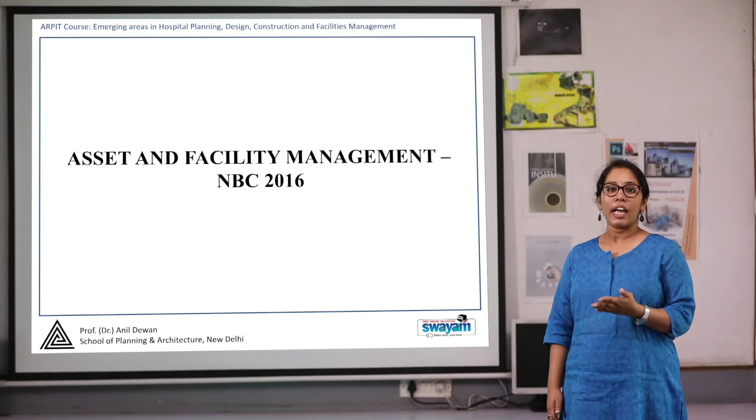As we have seen over the past decade, a lot of construction has already happened in India and it's booming further. We'll see that the growth of construction is going on. Since there is a lot of growth in construction, as a nation we need to have a building stock moving more efficiently. So the asset and facility management will ensure it. To realize full potential of asset and facilities, a well-planned maintenance strategy can make a positive impact on safety and business development. So what is the scope of this part?

It is relating to management of building assets and the associate facilities. It will include maintenance of types of facilities, fixed assets such as building and the services along it.

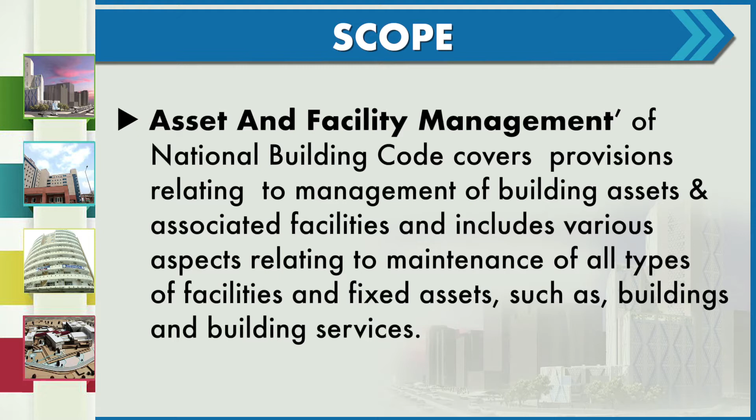So asset, let's define what is asset. For an individual, it is something that has a value, a life, and which is available to meet debts, commitments or legacies and performing functions to facilitate the user. So there are various types of assets we can have: physical asset, human asset, information asset, financial asset and intangible assets. But here for this course we are only focusing on physical assets.

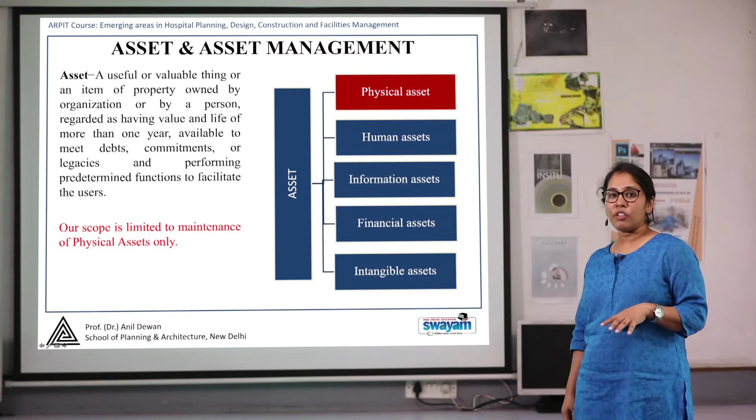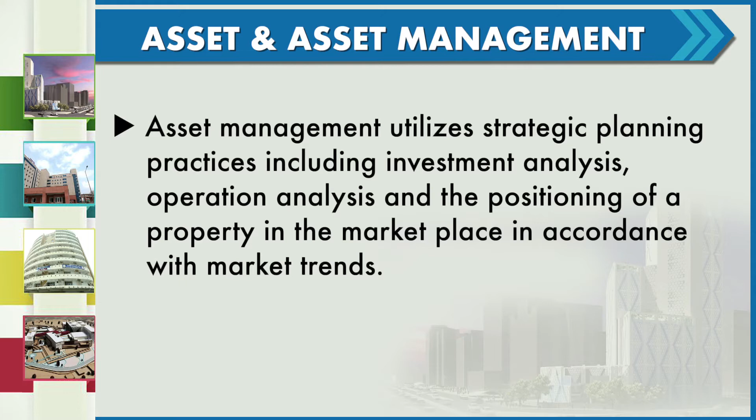So we discussed what is an asset. Asset management is a different entity in itself. It's a process for enabling the owner to maximize the value of any property or portfolio of properties by means of acquisition to disposition within the objectives that an owner defines for his property. Tools such as strategic planning, investment analysis, operation analysis, and how the positioning of the property in marketplace is according to the market. It is a simple real estate analysis.

If your property is within a commercial area, definitely its rates will be higher, and as you plan the asset, it will be beneficial to your own property.

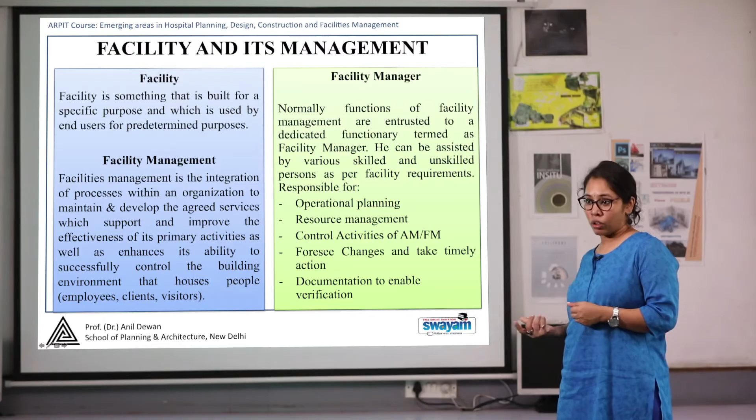Now, a facility cannot be run, for an instance of hospital. A doctor or a nurse cannot run facility. You need a specialist person who will take care of this. So a facility manager is a person who is assigned and who is skillful enough to take the responsibilities for operational planning, resource management, control activities of asset management as well as facility management. He foresees changes and takes timely action, and his task is also to document and verify what has been happening in the facility process.

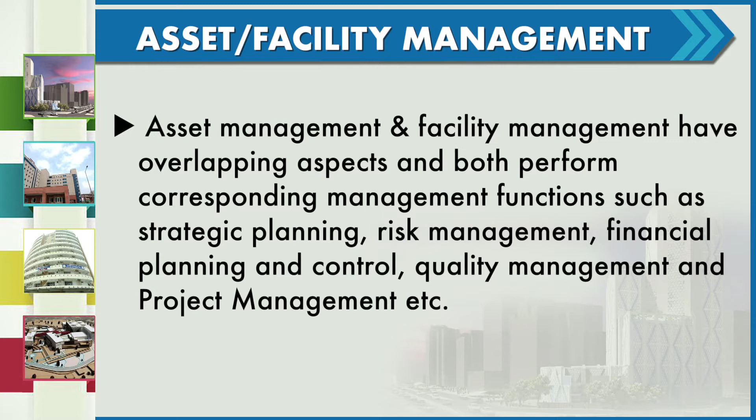So far we discussed what is asset management, what is facility management. These are actually an overlapping aspect. They both perform corresponding management functions such as strategic planning, risk management, financial planning and control, quality management and project management. So there are certain identified core competencies within the area of asset and facility management, which is communication, emergency preparedness and business continuity, environmental stewardship and sustainability, finances and business, health and safety environment, leadership and strategy, operations and maintenance, project management and quality.

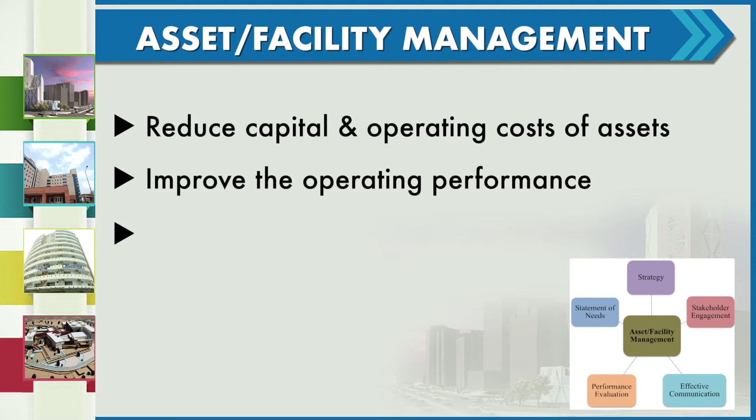So why do we require facility management in an organization? It has various importance such as reduction of capital and operating costs, improvement of operation, reduction in health impacts and safety risks of operating assets, minimize adverse environmental impact, maintain and improve the reputation, regulatory performance of any organization, reduce legal risks, enhance life of any asset, and it also ensures that the asset continues to meet a standard.

So here we see asset facility management has stakeholders engagement, effective communication, performance evaluation, statement of needs, and a strategy that is helpful for facilities.

We come to the organizational structure of any asset and facility management. Who are the people who guide any organizational structure of a facility management? It is the competence of any staff, organizational roles at various levels, facility manager, outsourcing of certain items that will help facilities, and what is the scope of work.

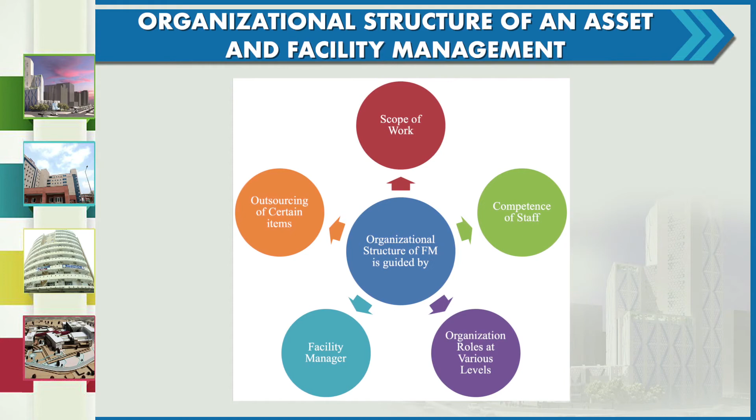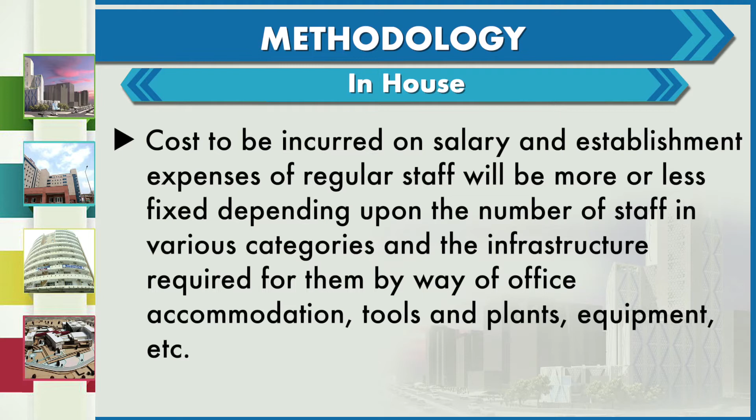Now, the methodology, it is divided into 3 parts, that is in-house, outsourced, and what process has to be adopted. So for in-house facility management, it will depend on what cost will be incurred for salary, establishment, and expenses for the staff, and it will also depend on the requirement, the availability of funds.

Cost incurred on work will depend on the actual quantum of work that has happened. According to that, the in-house facility will be categorized.

There are certain things, such as an internet facility, for instance, which can be outsourced. That is a facility that is outsourced, not in-house. So the organization will take into account what facility needs to be outsourced, what the risk behind it will be, and what activities can be controlled.

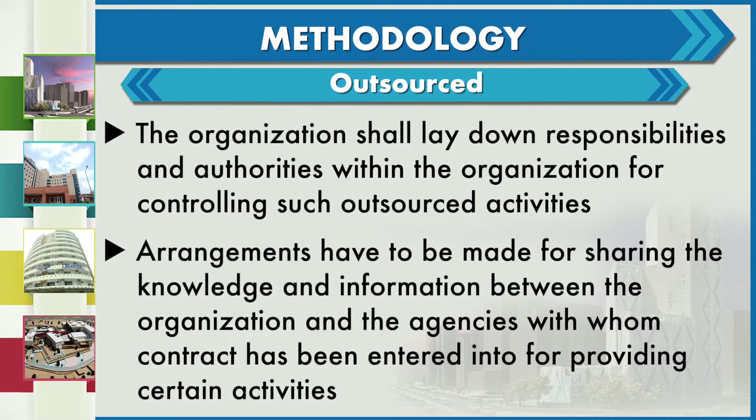There has to be a clear demarcation that this facility needs outsourcing, and the organization will lay down responsibilities and authorities within this. There will be an assigned person to take care of the outsourcing, and arrangements have to be made for sharing knowledge within your organization, so that support can be facilitated for this facility.

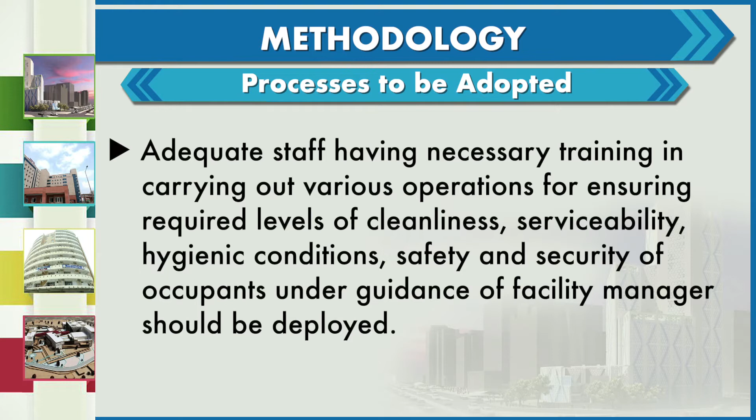The third thing is what processes have to be adopted within your organization, and necessary training that is required. When we go to malls, in the toilets we see a chart with tick marks and signatures. That is the facility management team's method of checking whether the facility in that area is functioning properly, so the person responsible has to be trained for that.

The facility management team will draw plans and tables to check that. Now coming to resource requirements for asset or facility management: the first things are resource assessment, resource plan, adequacy of resources, and need assessment.

Resource assessment comprises maintaining an individual asset to deliver the most effective outcomes in terms of minimal cost and risk. The resource plan is prepared for assets operating under normal conditions.

Need assessment should align its services needs, including dependency, utilization, location, capacity, and functionality. For adequacy of resources, the resources available may be compared with the resources required.

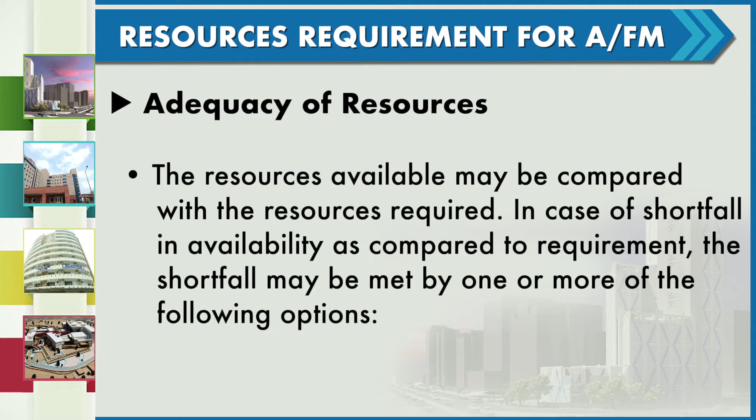The shortfall may be met by one or more options: augmenting in-house resources, augmenting outsourced resources, or when resources cannot be augmented, postponing the requirements which are not so urgent.

Procurement of services is one option in which you assess what procurement method is required for delivery of maintenance related services that best fits the business.

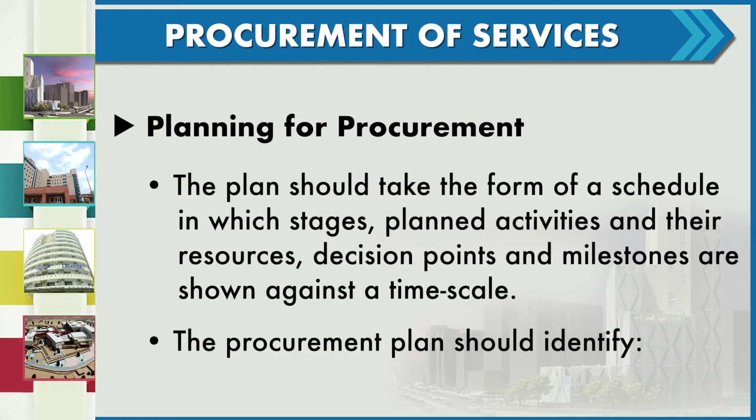Planning for procurement takes the form of deciding what activities need to be performed and the resources required accordingly. It will have decision points and milestones, shown against a time scale.

So what does the procurement plan do? It identifies stages and decision points in the procurement process, criteria for decision making, activities within stages and their sequences, sources of information and data to be used, individuals and external organizations to be involved and their roles, other stakeholders who may be involved, and resources needed to support the activities and deliverables at each stage and the form they should take.

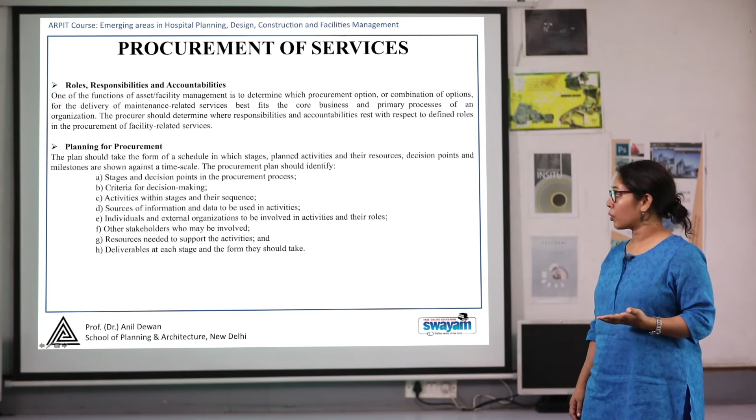It has two kinds of processes: pre-qualification, where you give a request for proposal and various procurement companies bid for it. This involves the legal form and ownership of the service provider, their area of specialization, proposed approach to service delivery, extent of subcontracting, relevant track record, and financial capacities.

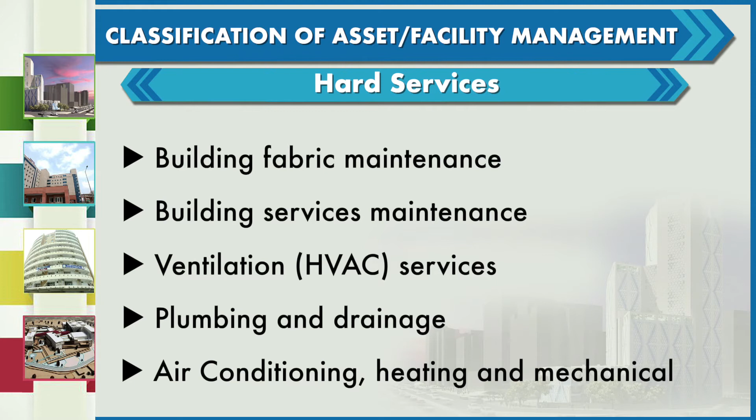As already said, there are two types of asset facility management: hard services and soft services. Hard services take care of your building fabric like the building envelope and roof, and building services maintenance such as HVAC systems, plumbing and drainage, air conditioning, heating and mechanical and electrical systems, lifts and escalators, firefighting detection and suppression, and roads and pathways. We will discuss this in detail in further slides.

Soft services include environment health and safety, landscaping and horticulture, waste management, housekeeping, pest control, security management, solid waste management—which is an important issue in hospital management—and common areas in the building and built environment.

It is natural that if we are constructing a building, it also requires maintenance. So the prime objectives of maintenance are to preserve building services and machinery in good operating condition, to restore them back to their original standards, and to improve facilities depending on the development of the building.

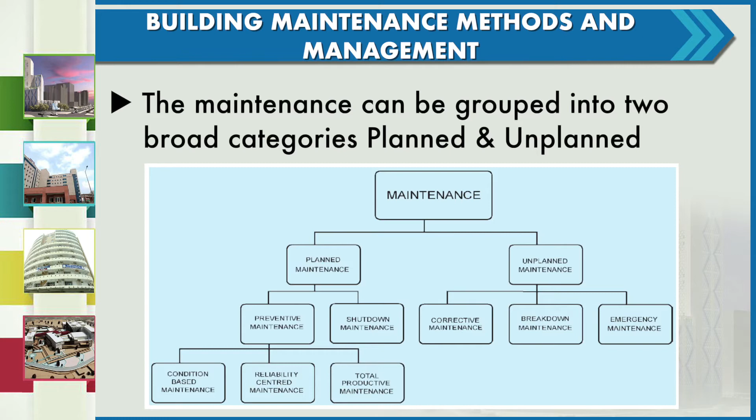Building maintenance can be categorized into two types: planned maintenance and unplanned maintenance. Planned maintenance, as the word describes, is when you already know that this kind of maintenance is required in the course of action. Unplanned maintenance can happen, suppose a duct is not working - that is an emergency case scenario, so you go and maintain that. This comes under emergency maintenance.

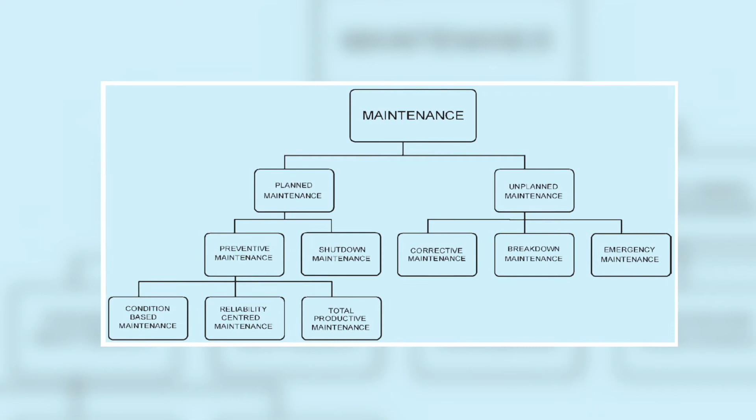Planned maintenance includes preventive maintenance and shutdown maintenance. Shutdown maintenance means you inform the occupants of the building beforehand that we are going to plan a shutdown for the building's maintenance, so they can plan their activities accordingly. Preventive maintenance has three types: condition based maintenance, reliability centered maintenance, and total productive maintenance. Unplanned maintenance can be corrective maintenance or breakdown maintenance - suppose there is a breakdown of your electric transformer or something, that is an example - and then emergency maintenance.

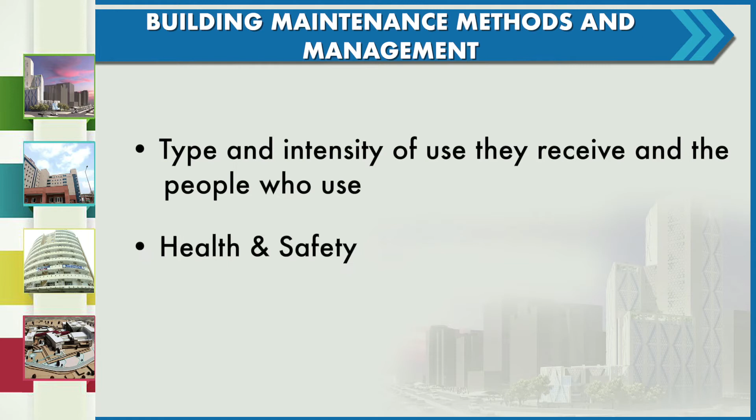Aspects influencing building maintenance can be technical factors like age of building, how it was designed, and what materials have been specified for its construction. Then there are certain maintenance policies that a building goes through, financial and economic factors, type and intensity of use - whether they have been used regularly or there has been less use - health and safety, and environmental factors. It also depends on how the design is influencing your building.

It may be due to attention of maintenance requirement from the planning stage, attention to services and testing of lines, life cycle cost, types of finishes, fire and life safety requirements, detailing of each and every component, accessibility for maintenance purpose, environmental factors such as external and internal, and any future requirements by the owner.

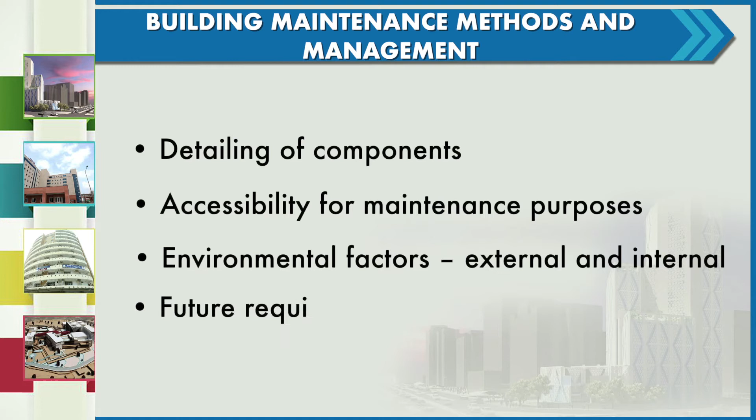Maintenance planning can be divided into four: assessment, financial management, planning process, and general planning. In assessment, an organization will assess the benefits of maintenance planning based on the assessment it has done. Financial management happens according to the budget that an organization has decided for the building's maintenance.

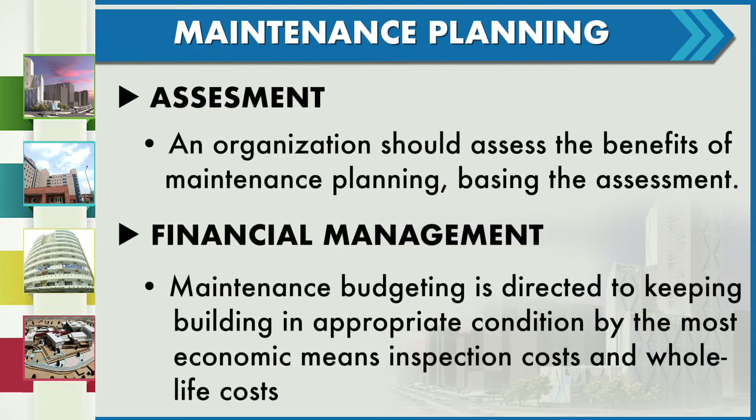Planning process involves information and data gathered from the process that will be used to reinform the organization's needs for and use of facility assets during this and future iterations of this process. In general planning, the maintenance plan should be prepared in consultation with stakeholders.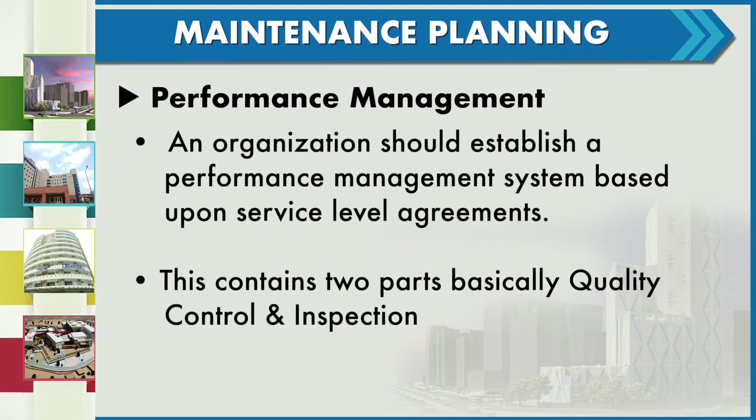Maintenance planning also involves performance management, which can be divided into quality control and inspections. Performance management is basically for improving the efficiency and effectiveness of maintenance management. It involves monitoring and controlling, and it can happen for both internal arrangements or outsourced arrangements, in two ways: quality control and inspection.

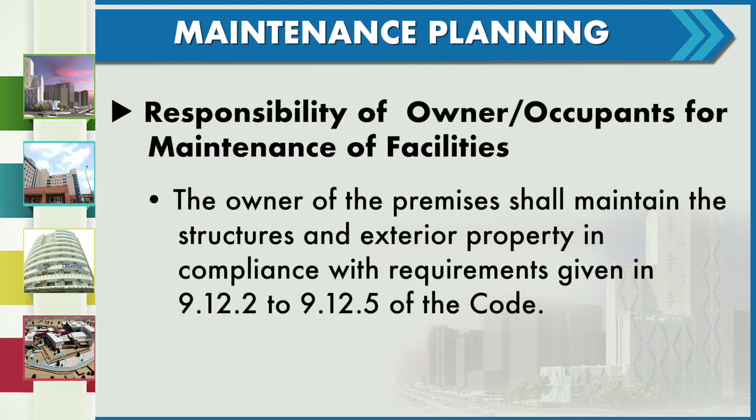Inspections mean that at every point of time you go and check if that facility is working properly or not. There are standard norms for maintenance management, discussed in Annex C of the code. Then responsibility of owner occupants for maintenance of facility is given in 9.12.2 of the code. Common area maintenance - maintenance of common areas in a building group - should be the responsibility of all those who share the common areas.

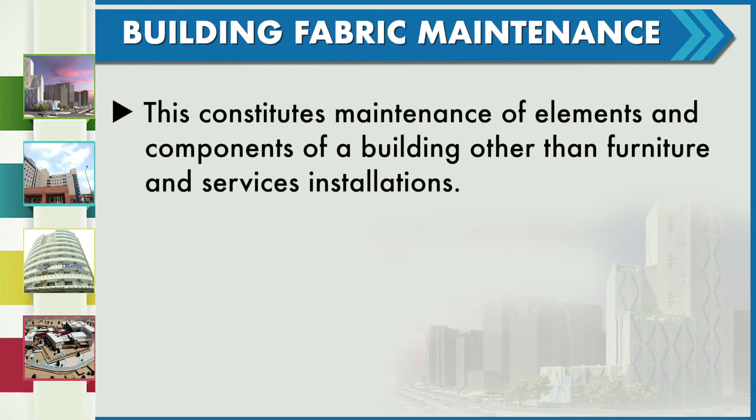Now we come to the details of hardcore services that I told you earlier. The first one is building fabric, which is your building envelope and other components other than furniture and services installations. It covers prevention of cracks, repair works, seismic strengthening, retrofitting of any existing building, and that will be done according to the construction management practice and safety given within the National Building Code.

While demolishing a damaged building or existing unsafe building, safety precautions will be given as per Part 7 of construction management in the code.

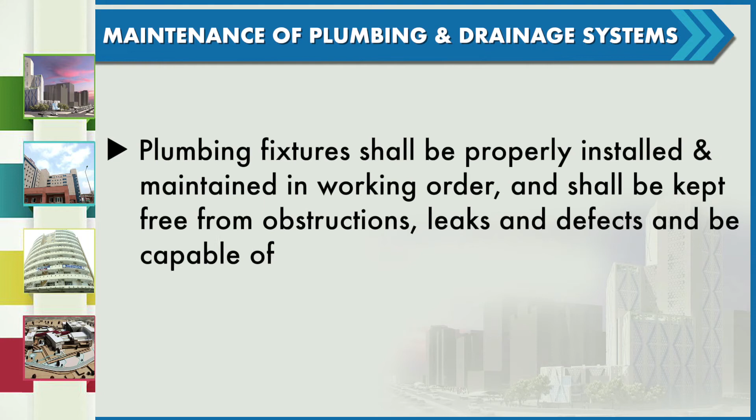Maintenance of plumbing and drainage system: the fixtures that are installed in plumbing shall be installed and maintained in working order. If there is a place where there is an immediate need attended, such as inadequate venting, cross connection, or back siphonage action, that will also come under maintenance of plumbing.

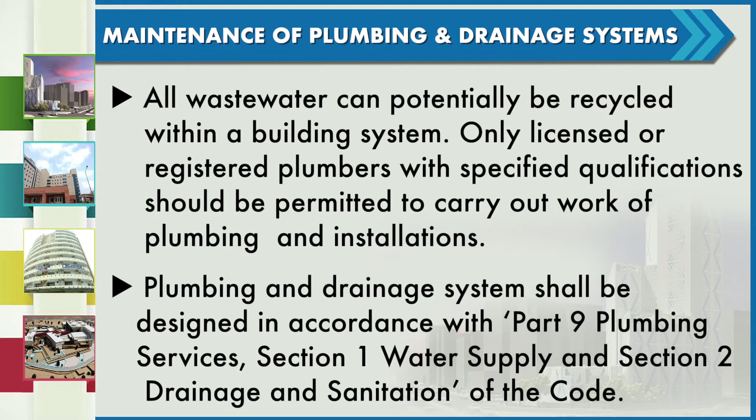All wastewater can or should be recycled within a building system, and it will be done only by licensed registered plumbers with specified qualifications. It is also important to provide rainwater harvesting and storage system to capture the runoff from the surfaces. So what are the precautionary measures that are needed to provide it?

It will avoid chemical drain cleaning products, prevent future clogging, install screens over the drains in showers and tubs, reduce the pressure, soften the water, and keep sewer lines or septic tanks clear. The details are given in section 11.10 part 12 of NBC 2016.

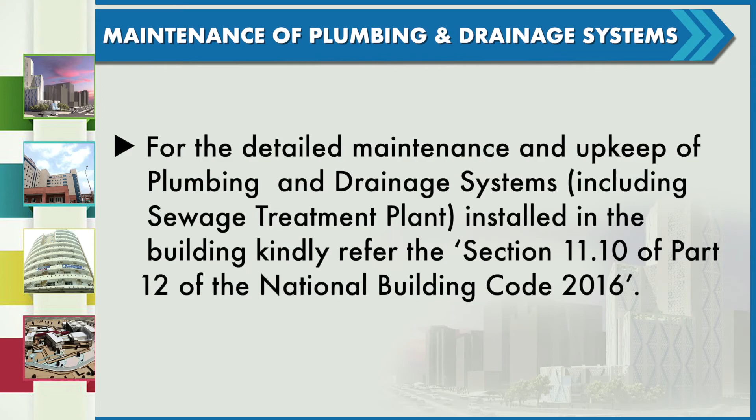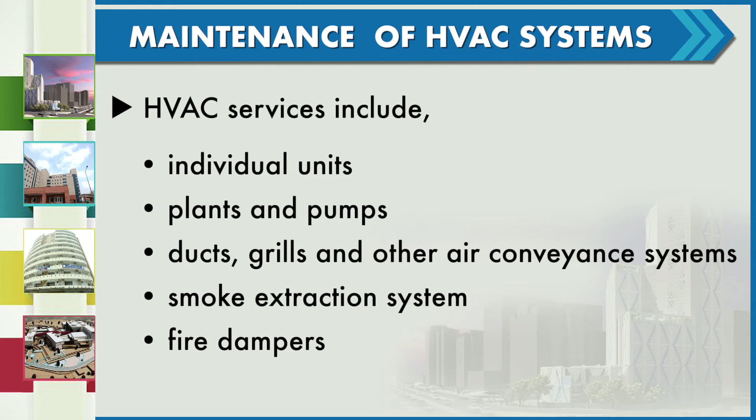Now coming to HVAC system. The aspects of operation and maintenance of HVAC services, so that it improves the performance of equipment, reduces the risk of failures, and increases the life and effective use of equipment, is covered under HVAC services. It includes individual units, plants and pumps, ducts, grills and other air conveyance systems, smoke extraction systems, and fire dampers.

For any effective management of this asset, a component-wise operation and maintenance protocol has to be observed. To perform this, you need to understand the basic operation system. A facility manager will also go through the operation manual of any system. The selection of system has to be taken accordingly, keeping in mind the specific requirement of the facility, duly computing the heat loads and other relevant factors within an HVAC system.

The most important maintenance within an HVAC system is regular cleaning of filters. Operation of a central AC plant will be in a sequential manner and beneficial to be done with a building management system. Depending upon the type of facility, type and specification of equipment installed, usage and other operational and financial constraints, the optimum frequency of carrying out the services should be determined.

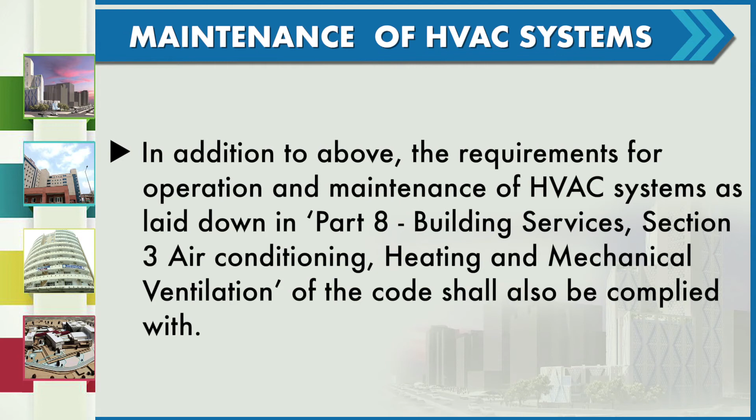In addition, the requirement of operation and maintenance is given in building services part 8, section 3, air conditioning, heating and mechanical ventilation. We come to the next section, that is maintenance of electrical installations.

Electrical installations in a building have to be installed and constantly maintained for uninterrupted use, and it has to be efficient use of electricity including safety from fire and shock.

The coverage is limited to maintenance of internal electrical installations, which will cover HV panels, HV switches, transformers, LV panels, floor panels, earthing, internal electrical distribution systems, light fixtures, switches, lightning arresters, street lighting systems, facade lighting and transformers.

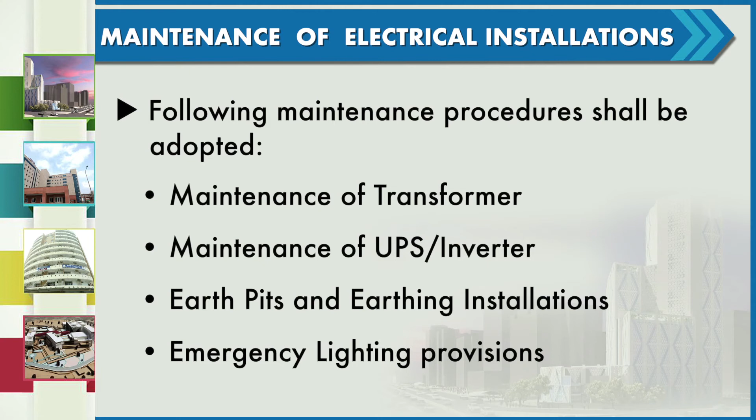The manufacturers will be requested to at least minimum specify the routine maintenance and post-fault maintenance. The following maintenance procedure shall be adopted: maintenance of transformers, maintenance of UPS, earth pits, earthing installations, emergency lighting provisions, maintenance of circuit breakers, maintenance of battery, DG set and its auxiliary operation, lockout and tag out process. Proper signages shall be displayed to discourage any unauthorized personnel in this area.

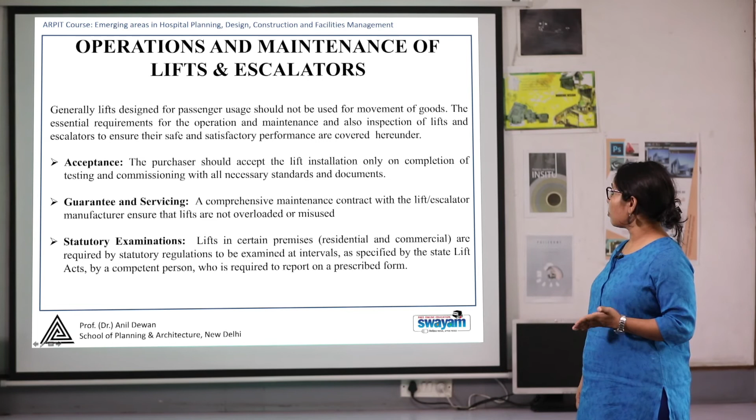Operations and maintenance of lifts and escalators. Usually the lifts are designed for passengers, but in a hospital scenario they will again be differentiated for passengers, for visitors, and for carrying patients, beds and trolleys.

It will be according to that, and the maintenance and operations will follow differently for each and every lift system. The purchaser will accept lift installation only after the testing and commissioning, once it has followed all the standards required for the installation.

It will give guarantee and servicing, a comprehensive maintenance contract will be maintained, and the statutory examinations will be done. Lifts in certain premises will be required by statutory regulations to be examined at intervals specified by the state lift acts, by a competent person who will make a report in a prescribed form.

Operations and maintenance of lifts and escalators will again have an annual maintenance contract. A document is made in the interest of the lift purchaser and manufacturer within agreed terms by both parties. There are two types of service contracts, comprehensive contracts and non-comprehensive contracts. Usually a service contract is made for 12 months at a time.

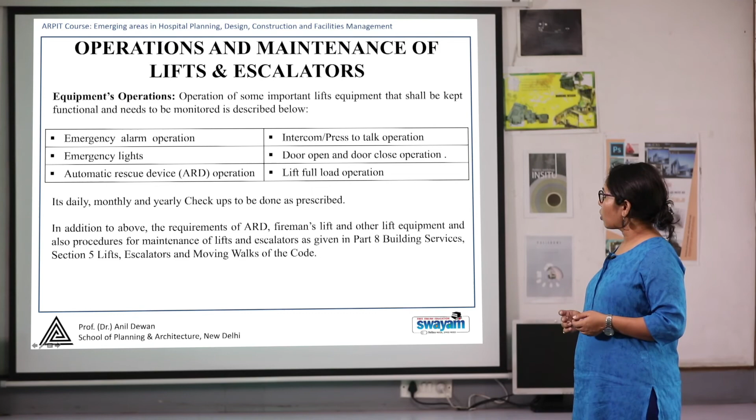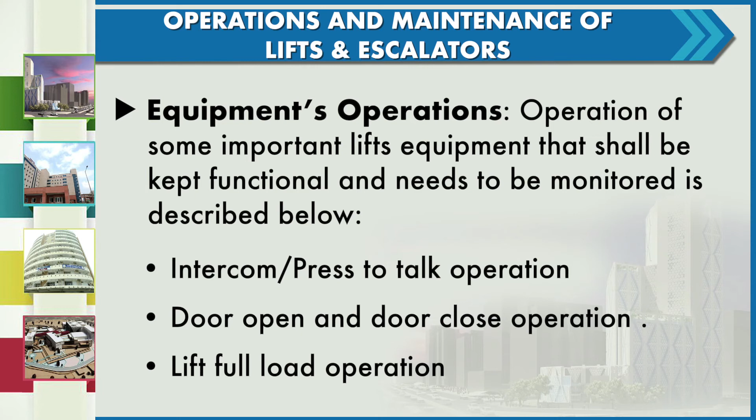The equipment's operations shall be kept functional and monitored in the following manner: emergency alarm operation, emergency lights, automatic rescue device operation, intercom press-to-talk operation, door open and door close operation, lift full load operation, and it will be checked on a daily, monthly or yearly basis as prescribed.

In addition, there will be a fireman's lift, other lift equipment, and procedures for maintenance of lifts, which will be given in the further part of the National Building Code.

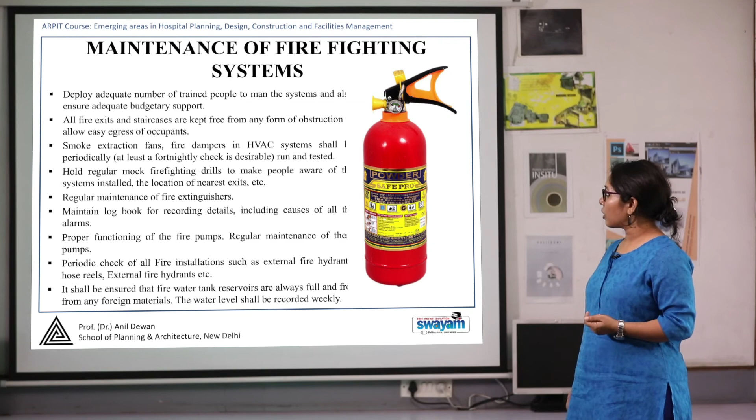Firefighting system in a building is very important, and especially in a hospital building we have to take care that it is done in a proper manner. There shall be deployment of a trained number of people to man the system. All fire exits and staircases will be kept free from any obstruction.

Smoke extraction fans and fire dampers in the HVAC system will be checked periodically and then run and tested. Mock firefighting drills are conducted, where a fire alarm system is played within the building for occupants to ensure they respond to the alarm and evacuate as soon as possible. This has to take place periodically.

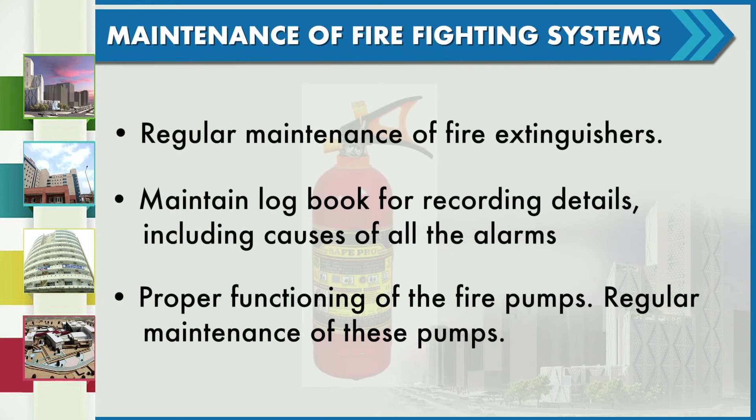Regular maintenance of fire extinguishers has to take place. A logbook has to be maintained including causes of all the alarms, proper function of fire pumps, and regular maintenance. There should be a periodic check of all fire installations such as external fire hydrants and hose reels. The most important thing is that all fire tank reservoirs should be full and free from any foreign materials. The water level will be recorded weekly.

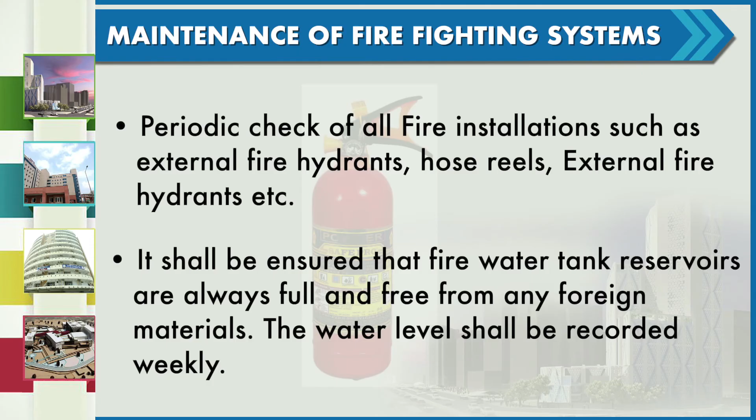Even the landscape hardscape needs maintenance on a time to time basis. It has to be ensured that roads are well planned and footpaths are provided at a standard height, usually 150 mm above the road surface, so they do not cause any obstructions to vehicles and are easily maneuverable.

All services required at construction should be taken care of in the planning stage itself, beforehand. Special attention should be paid to drainage areas, proper surveys and outlets of rainwater shall be ensured, ease of movement, road layouts indicating location of culverts, cross drainage and other underground services shall be prepared.

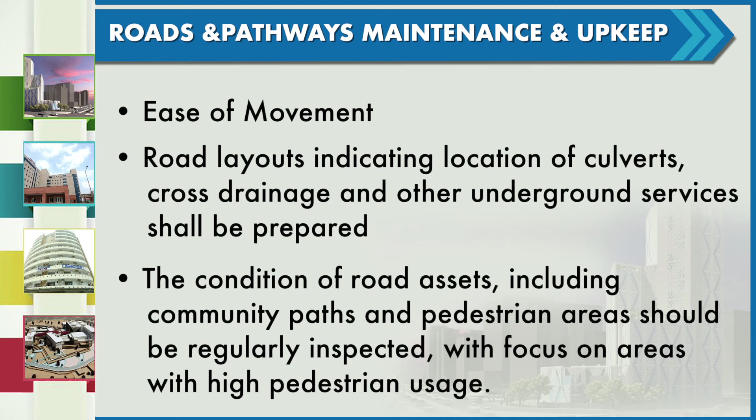The condition of road assets, including the paths within the community or pedestrian area, will be regularly inspected with focus on areas with high pedestrian usage. A pavement maintenance management system is used for managing or directing and controlling maintenance resources in a scientific manner for optimum benefits for the major road system.

Health and safety requirements: personal protective equipment, that is PPE, is a basic requirement that will be supplied to the employees at the time of construction. This is a stage which will be at the time of construction.

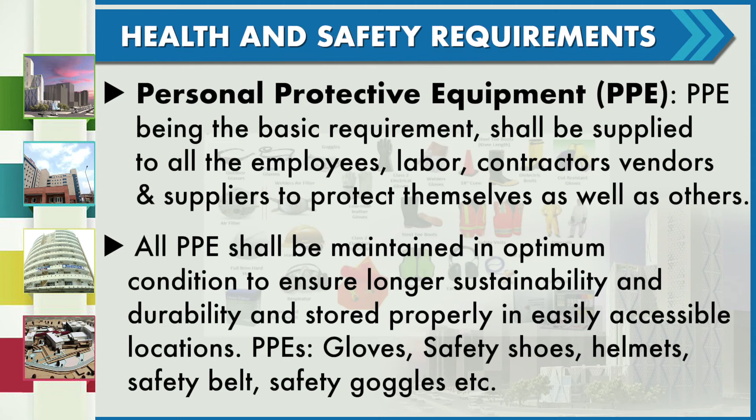There are certain maintenance tools which are recommended, such as class 2 electrical gloves, welding gloves, dielectric boots, safety vests and full brim hard hat. These are used during construction, and when you are going to maintain any facility you need to wear this for health and safety.

Next is maintenance of landscaping and horticulture works. The objective here is to provide defined services as per the landscape maintenance specifications laid down for a property. This will cover hardscape as well as softscape weekly maintenance services.

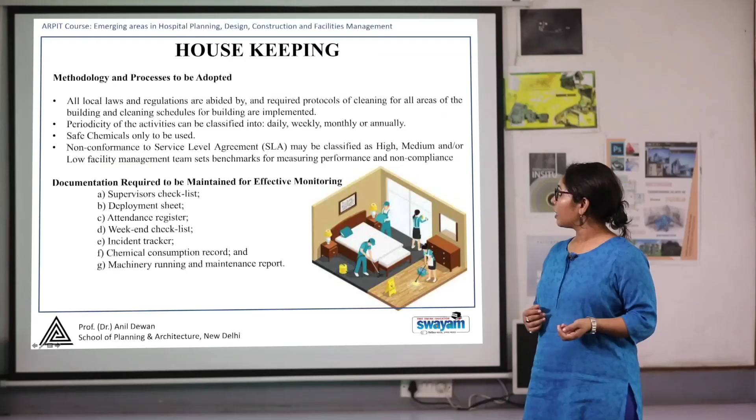Next is housekeeping, the methodology and processes that need to be adopted. All local laws and regulations are abided by, and required protocols for cleaning all areas of the building and a cleaning schedule are implemented. Periodicity of activities can be classified as daily, weekly, monthly or annually.

Safe chemicals are only to be used, specifically in hospitals where we need to ensure safe chemicals are used. Non-conformance to the service level agreement may be classified as high, medium and low facility management.

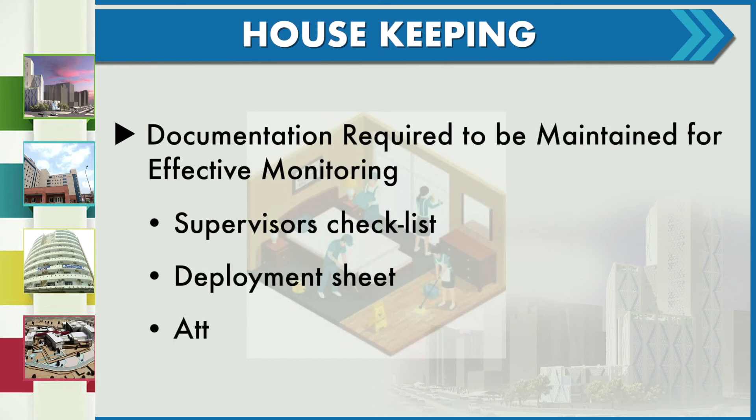There are certain documents required to be maintained for effective monitoring, such as supervisor checklist, deployment sheet, attendance register, weekend checklist, incident tracker, chemical consumption record, and machinery running and maintenance report.

Pest and rodent control: a clean environment and prevention is the starting point of pest control. It is a process which eliminates and minimizes a wide range of undesirable pests and insects.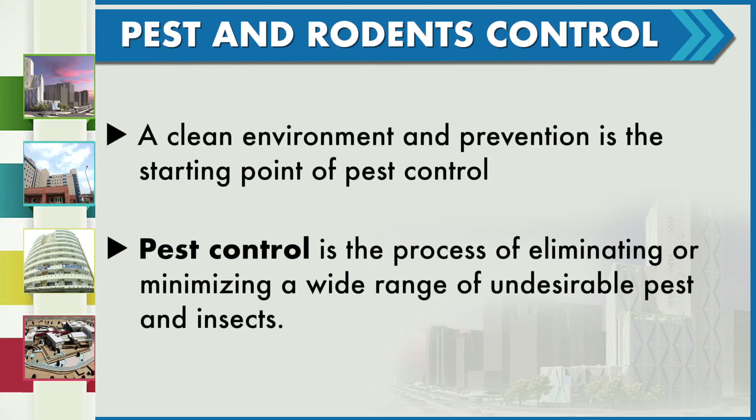Preparation of an integrated pest management plan can be useful, following guidelines such as: preventive measures should be explored, alternative methods of control to be evaluated, timely action for effectiveness and safety, adequate monitoring and documentation, and the most effective method to be adopted that has cost benefit and least environmental effect.

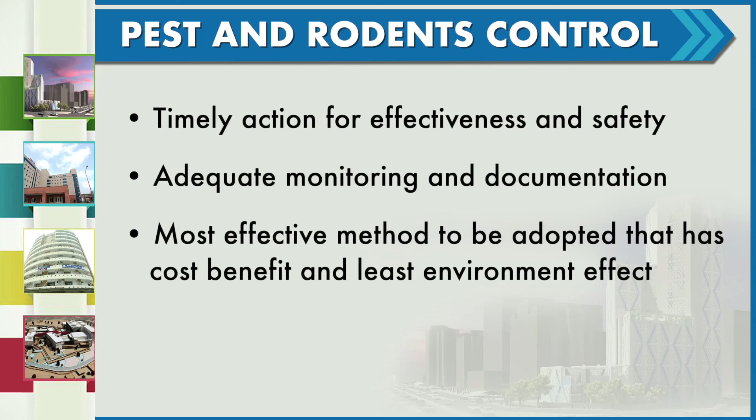The security services: the aim of any security services within a building is to take adequate measures and deny any opportunity of theft, of acquiring information, or committing sabotage or subversion activities by any antisocial element.

Physical security addresses threats, vulnerabilities, and countermeasures that can be utilized physically to protect any assets or resources. There are 8 categories of physical security measures: crime prevention through environmental design, physical barriers and site hardening, physical entry and access controls, security lighting, intrusion detection systems, video surveillance, security personnel, and security policies and procedures.

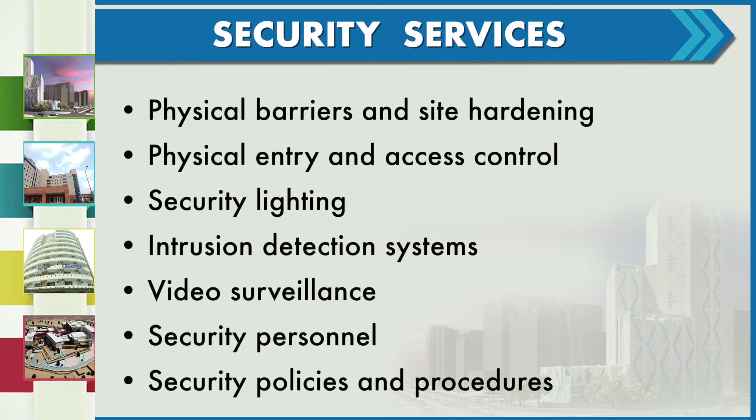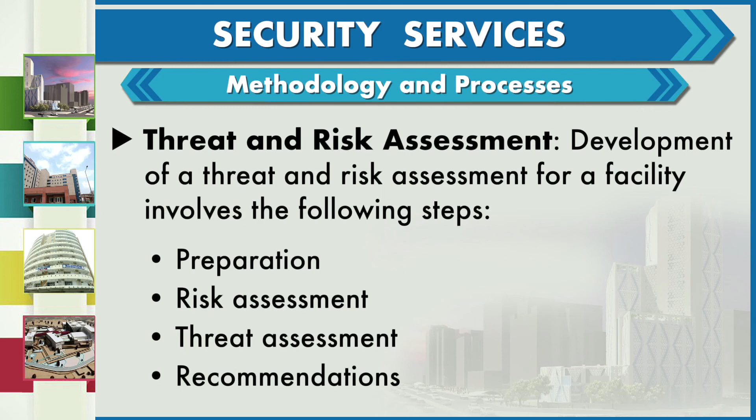It has a methodology and process. First, threat and risk will be assessed, then a security strategy will be formed, then a site development plan. For the methodology and process, the strategy will be formed and common service standards will be followed. The methodology involves threat and risk assessment for the facility, which includes preparation, threat assessment, risk assessment and recommendations, followed by site development and security strategies.

This involves segregation of public and private areas - you need to form different public areas in hospitals and private areas separately. It also involves segregation of high and low security level areas, access control and alarm regeneration, surveillance, physical security, screening of personnel and vehicles, layered security through multiple tiers, crime prevention through environmental design, and response to potential threats and incidents.

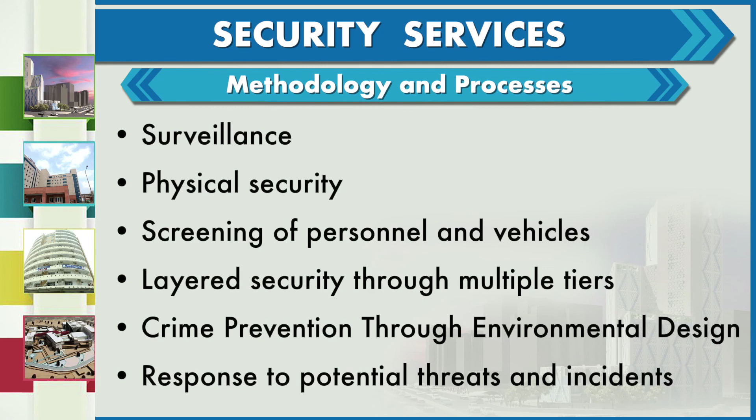Common service standards are patrols, controlled access during out of hours, vehicle access control, CCTV monitoring, screening of personnel entering facilities, and radio communications.

Solid waste management - the requirement for waste management in buildings is applicable to large or small facilities that generate, store or handle any type or quantity of waste. There should be guidelines for a waste management system: minimizing waste generation, reuse and recycling of waste, waste segregation, and waste disposal. Solid waste management planning facilitates categorization of waste generators, and it contains a waste prevention strategy, recycling and reuse, and treatment disposal.

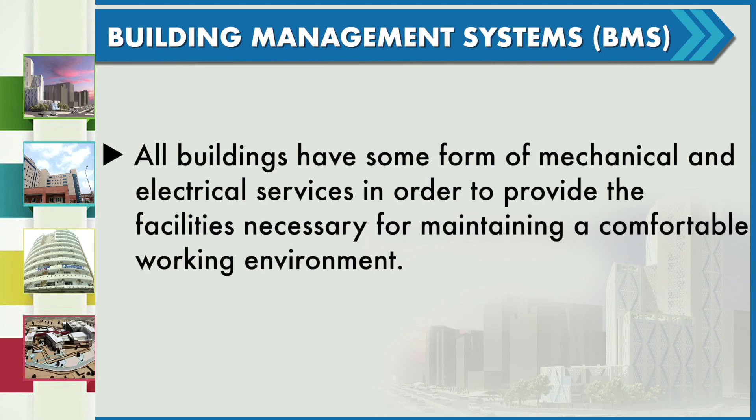Building management system - all buildings have some form of mechanical or electrical services, and to provide facility necessary for maintenance of such services, there is a special building management system. These services have to be controlled by some means to ensure that the facilities available are designed to provide comfort conditions, irrespective of the number of people or individuals with preferences.

It is a standalone computer system that can calculate the preset requirements of a building and control the connected plant to meet those. The purpose is to automate and take control of these operations in the most efficient way possible, and the level of control via BMS is dependent upon information received from its sensors.

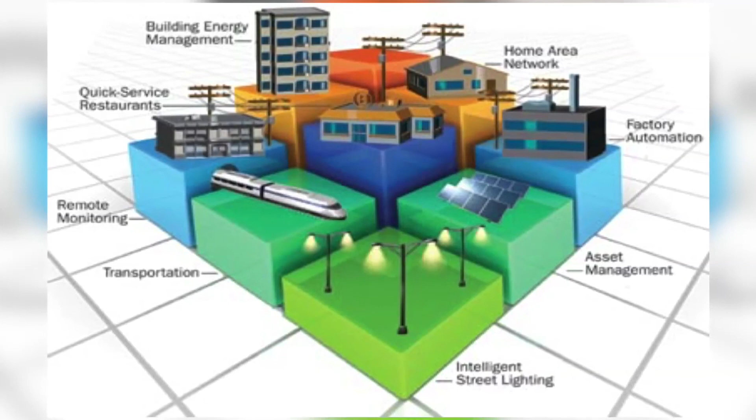Here we see an image which shows how BMS takes control of intelligent street lighting, asset management, factory automation, home area network, building energy management, quick service, remote monitoring and transportation.

BMS can control certain key operations such as HVAC systems, lifts, all equipment having variable frequency drives, lighting systems, water supply systems, sewage treatment plants and effluent treatment plants, medical and other gas supply systems, ventilation systems, and fire alarm, suppression and firefighting systems.

Information management - any organization needs to keep records safe and in a secure location so that they are arranged and enable rapid retrieval. Records and documents relating to maintenance of facility should be organized and kept up to date in a stored, secure environment. The following information should be recorded: classification of the facility and its subdivision.

This includes obligations under conditions of lease or occupancy, statutory and insurance inspections, records of property holdings with legal status, ownership of maintenance obligations of parties, right of way, easement and way leaves, and requirements and restrictions laid down by planning, building regulation control and fire authorities.

The documentation that has to be maintained includes the facility handbook, drawings, specifications, schedules, asset register, warranties, repairs and spare parts, engineering installation records, mechanical records, electrical installation records, and operating and maintenance manuals.

Checklists - there are certain activities which require inspection and maintenance of assets, and the checklist is the method by which you can ensure this. These checklists may be of various forms, from asset to asset and from organization to organization.

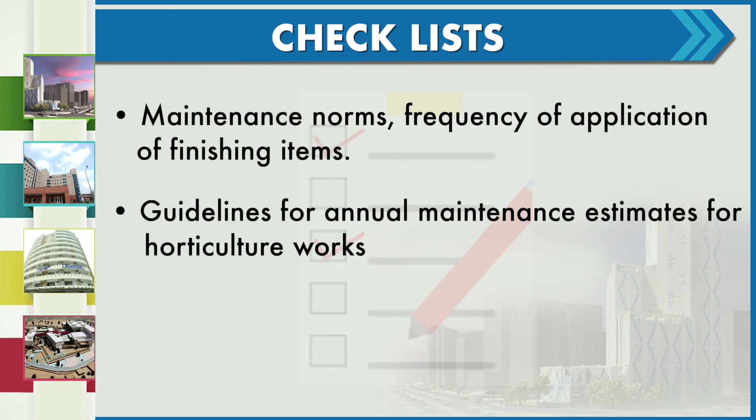There are certain examples of checklists such as registers of buildings, amount admissible per annum for carrying out maintenance, maintenance norms, frequency of application of finishing items, guidelines of annual maintenance estimate for horticulture works, classification of horticulture maintenance work, inspection lists for civil, electrical, and horticulture work, and additional inspection lists for critical buildings as required.